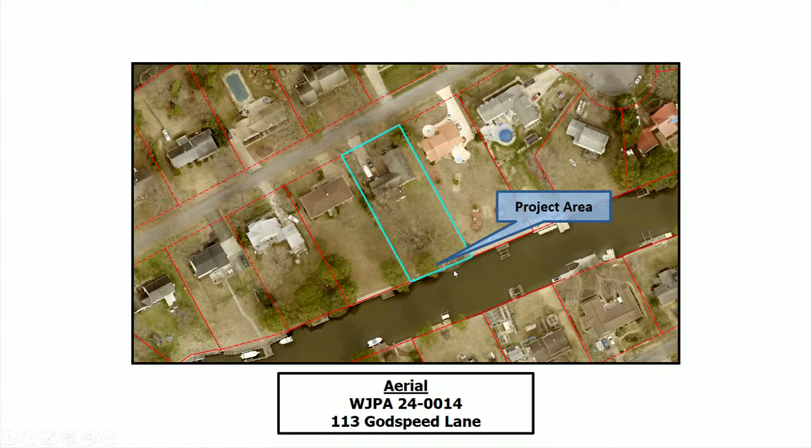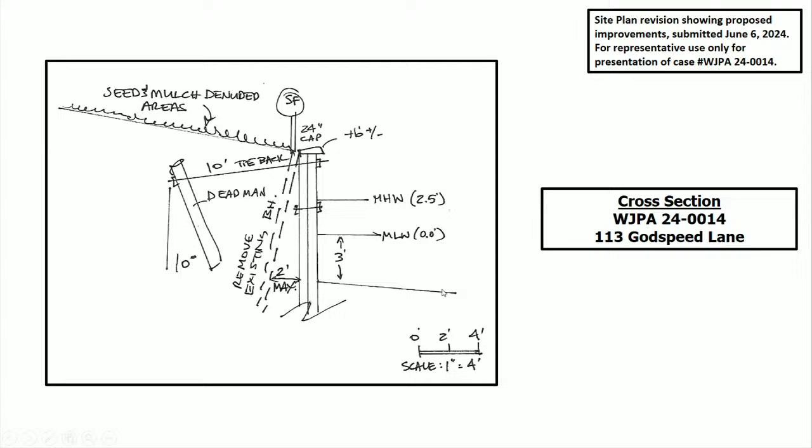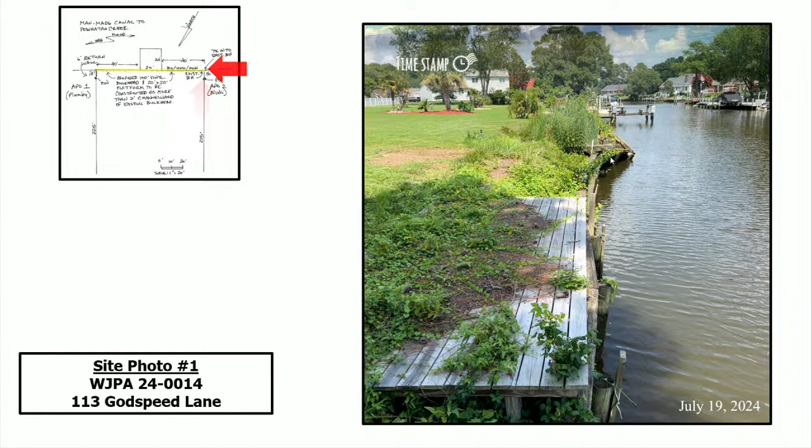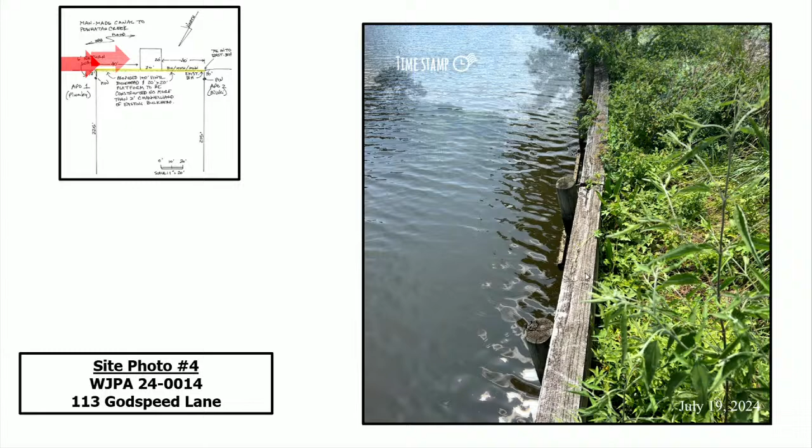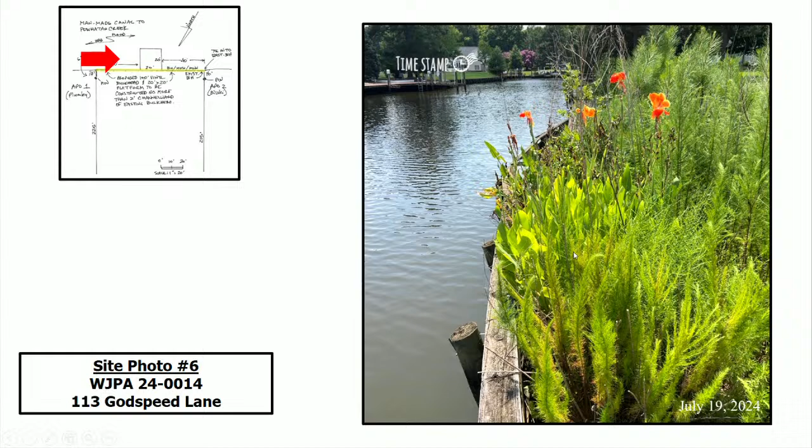Current site conditions, as you can see from this angle, you can see where that bulkhead's failed. And then this is where it's tying into the adjacent property line, kind of from that same corner. Here's some existing vegetation where that bulkhead's failed. This is from the other side of that bulkhead, kind of from that point where it'd be tying in again to the adjacent property's bulkhead. And then just another shot from that same side of, again, where that bulkhead has failed, the vegetation and platform. Closer up image of the vegetation growing. Let me see.

As published in the Virginia Register on July 11th, 2005, the revised Wetland Mitigation Compensation Policy and Supplemental Guides, Regulation 4 VAC 20-390-10. Virginia, as a Chesapeake Bay program partner, is committed to, quote, achieve a no net loss of existing wetlands acreage and function in the signatories' regulatory programs.

In order for a proposed project to be authorized to impact wetlands and compensate for the wetland loss in some prescribed manner, the following three criteria must be met. One, all reasonable mitigative efforts, including alternative siting, which would eliminate or minimize wetland loss or disturbance, must be incorporated in the proposal. Two, the proposal must clearly be water dependent in nature.

And 3, the proposal must demonstrate clearly its need to be in the wetlands and its overwhelming public and private benefits. If the proposed project cannot meet one or more of the above criteria, the project must be denied or must occur in areas outside of wetlands. Should it satisfy all three criteria, however, compensation for the wetland loss is required. The sequence of acceptable mitigation options should be as follows: on-site, off-site within the same watershed, mitigation banks in the same watershed, or a payment of an in lieu of fee. If compensation is required, it should be a condition of the permit.

Staff has reviewed the application and finds that this project meets the three criteria outlined above. There are 90 square feet of vegetated wetland impacts associated with this project. Staff will require the purchase of 90 square feet of tidal wetland mitigation from a qualified tidal wetlands mitigation bank and proof of purchase prior to the start of the project. Staff has reviewed the above application and recommends approval of the application as presented. Should the board wish to approve the application, staff suggests the following conditions be incorporated into the approval.

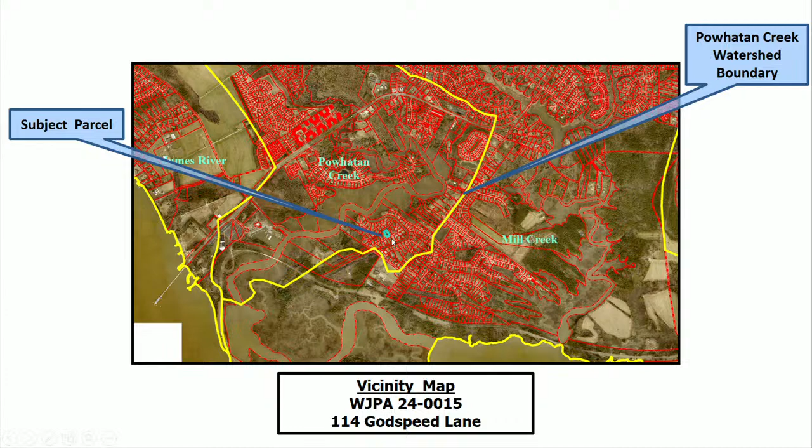Mr. Chairman, members of the board, Emily Grosjean presenting WJPA 24-0015. Ms. Carla Havens, Mid-Atlantic Resource Consulting, has applied for a wetlands permit on behalf of Mr. Gary and Ms. Kathy Nestor for the construction of a bulkhead, 20 by 20-foot platform, two 5-foot by 30-foot catwalks, and a boat lift on property located at 114 Godspeed Lane within the Powhatan Creek watershed. Again, we see that watershed outline here in yellow with the parcel in question in blue.

According to the submitted drawings, disturbance within the resource protection area for the installation of deadmen and tiebacks is to occur 10 feet landward of the canal for a total of 1,100 square feet of disturbance within the RPA. The disturbed area will be restabilized after the project is completed. Should the bulkhead construction also take place from the uplands, a revised site plan must be submitted for review and a possible land disturbing permit.

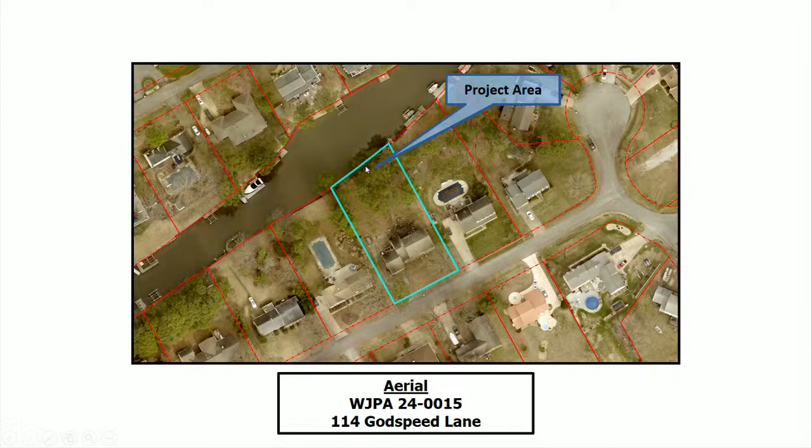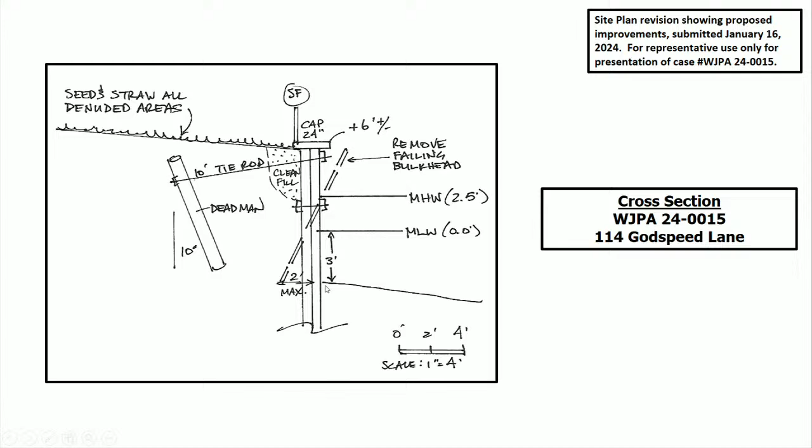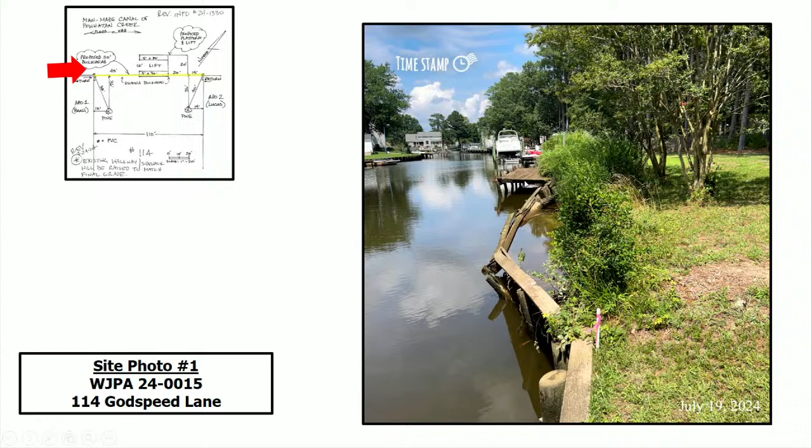And then this is, again, a cross-section, just kind of showing, again, that 10-foot deadman tieback along with any disturbed area to be stabilized thereafter. Current conditions, this is a tie-in with the adjacent property owner's bulkhead. As you can clearly see, this bulkhead has failed, which is causing failure of the existing platform as well. This path here will be brought to grade upon completion of whatever work.

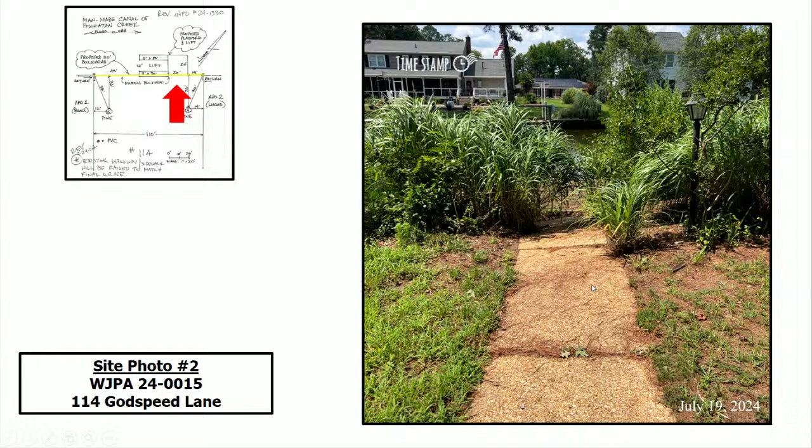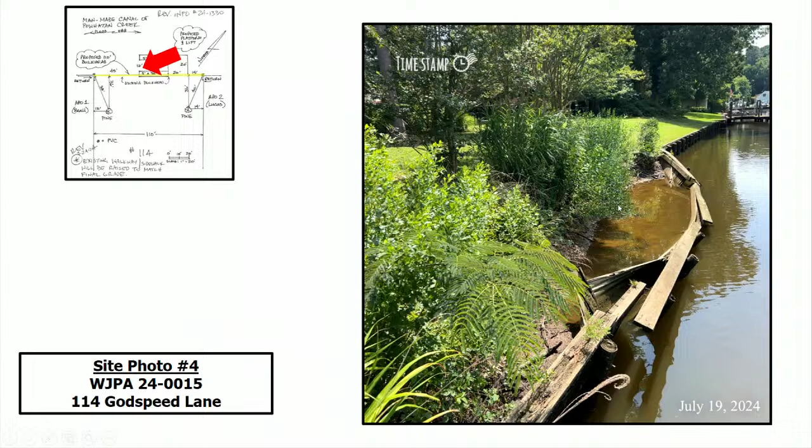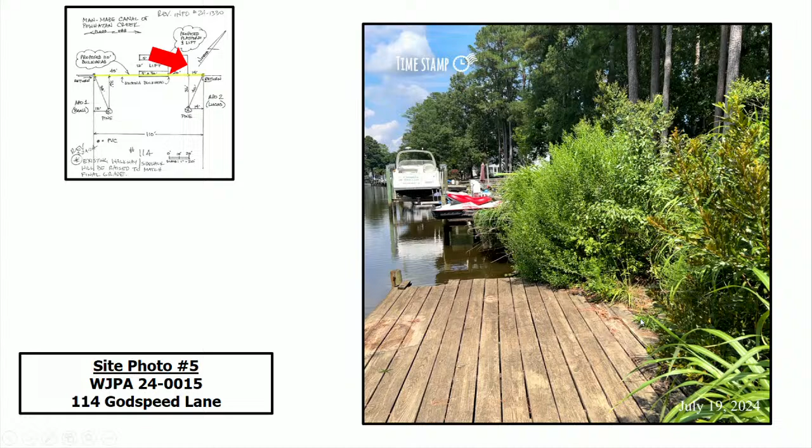And then standing on that platform, just from a different angle here, you can see again where that bulkhead has since failed. And just kind of a closer up shot, also showing any kind of vegetation that's grown in as a result of that failure. And then here's just another shot. You can't see it as well due to the vegetation, but again, where the other end of that bulkhead will be tying in with the adjacent property. And then just kind of, again, showing some of that vegetation, and you can kind of make out where that bulkhead has failed.

As published in the Virginia Register on July 11th, 2005, the revised Wetland Mitigation Compensation Policy and Supplemental Guidelines, Regulation 4 VAC 20-390-10. Virginia, as a Chesapeake Bay program partner, is committed to, quote, achieve a no net loss of existing wetlands, acreage, and function in the signatories' regulatory programs. In order for a proposed project to be authorized to impact wetlands and compensate for the wetland loss in some prescribed manner, the following 3 criteria must be met.

1, all reasonable mitigative efforts, including alternative siting, which would eliminate or minimize wetland loss or disturbance, must be incorporated in the proposal. 2, the proposal must clearly be water dependent in nature. And 3, the proposal must demonstrate clearly its need to be in the wetlands and its overwhelming public and private benefits. If the proposed project cannot meet one or more of the above criteria, the project must be denied or must occur in areas outside of wetlands.

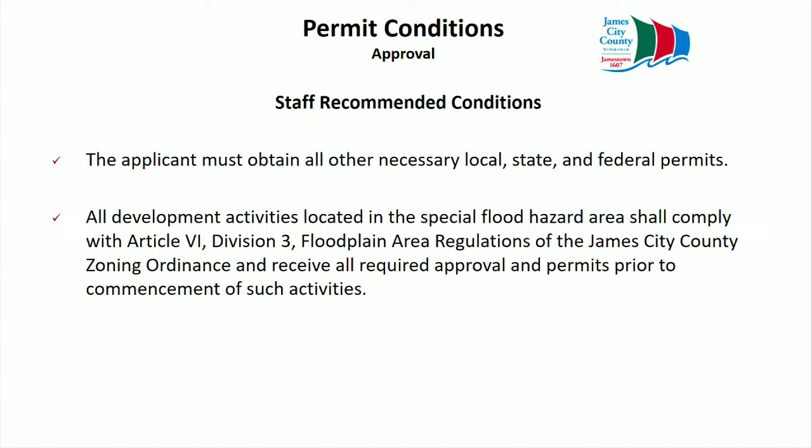Should it satisfy all 3 criteria, however, compensation for the wetland loss is required. The sequence of acceptable mitigation options should be as follows: on-site, off-site within the same watershed, mitigation banks in the same watershed, or a payment of an in lieu of fee. If compensation is required, it should be a condition of the permit. Staff has reviewed this application and finds that this project meets the 3 criteria outlined above. There are 10 square feet of vegetated wetland impacts associated with this project. Staff will require the purchase of 10 square feet of tidal wetland mitigation from a qualified tidal wetlands mitigation bank and proof of purchase prior to the start of the project.

Staff has reviewed the above application and recommends approval of the application as presented. Should the board wish to approve the application, staff suggests the following conditions be incorporated into the approval. Applicant must obtain all other necessary federal, state, and local permits as required for the project. Development activities located in the special flood hazard area shall comply with Article 6, Division 3 floodplain area regulations of the James City County zoning ordinances and receive all required approval and permits prior to commencement of such activities. Applicants must submit proof of purchase of 10 square feet of tidal wetlands mitigation from a qualified tidal wetlands mitigation bank prior to the issuance of a building permit.

The wetlands permit for this project shall expire on August 14th, 2027 if construction has not already begun. And if an extension of the permit is needed, a written request must be submitted to the Stormwater and Resource Protection Division no later than July 3rd, 2027, which is 6 weeks prior to the expiration date. If you have any questions, I'd be happy to take them at this time. Any questions for Ms. Grosjean? No, thank you. All right. Thank you, Ms. Grosjean.

I'd like to open up the public hearing on this matter. Anyone from the public wish to speak? Mr. Chairman, members of the board, Carla Havens, Mid-Atlantic Resource Consulting. Thank you again for another thorough presentation. Again, I've spoken with Tom Ty, and 10 square feet of tidal wetlands are available at his bank. Any additional questions? All right, thank you so much. Anyone else wish to speak? Hearing none, seeing none, I will close the public hearing on the matter, and the matter is before the board.

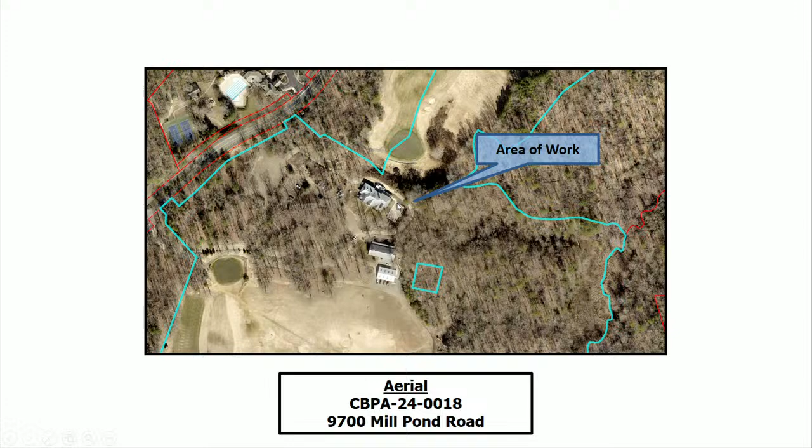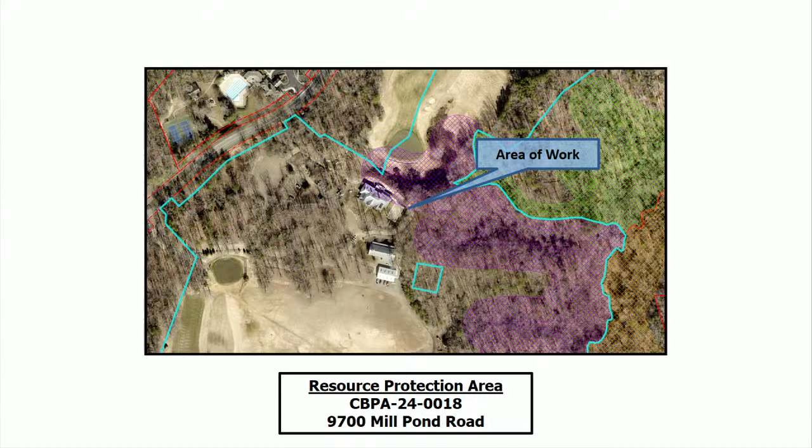From the site plan, the area in yellow, part of this concrete path, the gravel, part of the patio and retaining wall, all built without permits, and that's what's before the board tonight for an after-the-fact exception request. This right here is a cart path built with the golf course, and even though it's in the RPA, it is not under discussion tonight. It was built and approved prior to the RPA extensions in 2004.

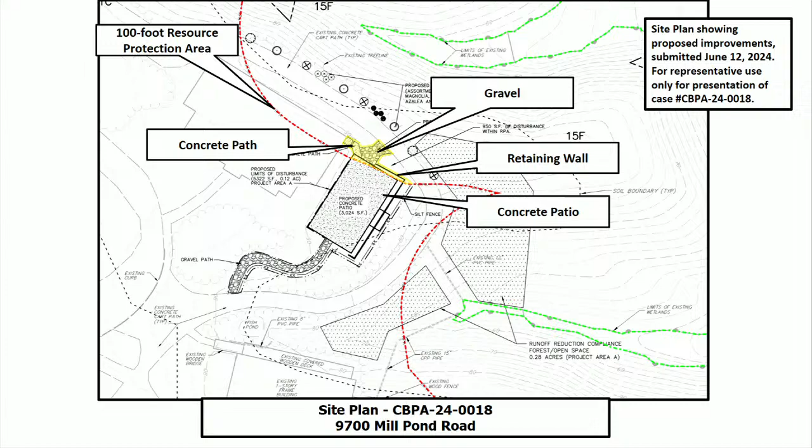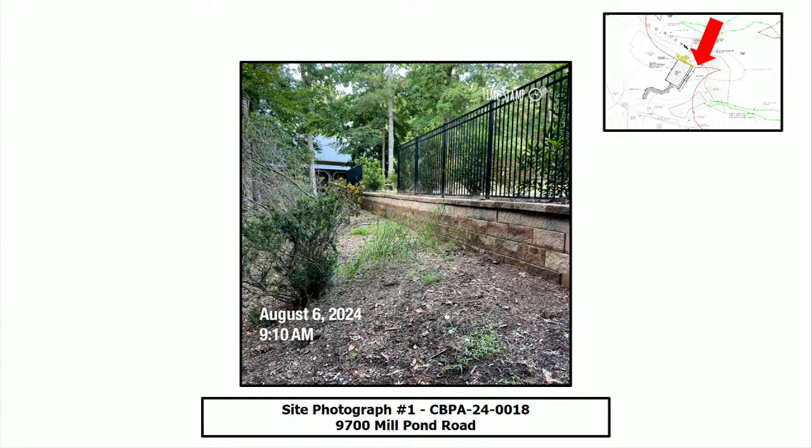A couple of site photographs of the area in question. The retaining wall in question is less than 3 foot in height, does not require a building permit, but still required Chesapeake Bay Board approval. Some plantings up here between the retaining wall and the patio, as you can see. And then the gravel path from the cart path down here in the lower right. The building, again, that's the restaurant. And then this sidewalk down into the patio.

A couple other views. There's this portion of the patio that's in the RPA. And the view is looking at the 18th green from the golf course.

So the total lot size for the property is just under 48 acres, of which 40% is located within the RPA. In December of 2022, officials from the James City County Stormwater Resource Protection Division did receive notice that a concrete patio and retaining wall were being installed on the property without the submission of a Chesapeake Bay Preservation exception, building permits, or an approved site plan.

The applicant began the process of obtaining the site plan and permits for the construction of the patio and the retaining wall. If the required site plan had been submitted initially as part of the normal process, staff would have worked with the applicant to adjust accordingly to get the patio out of the resource protection area to the greatest extent practicable.

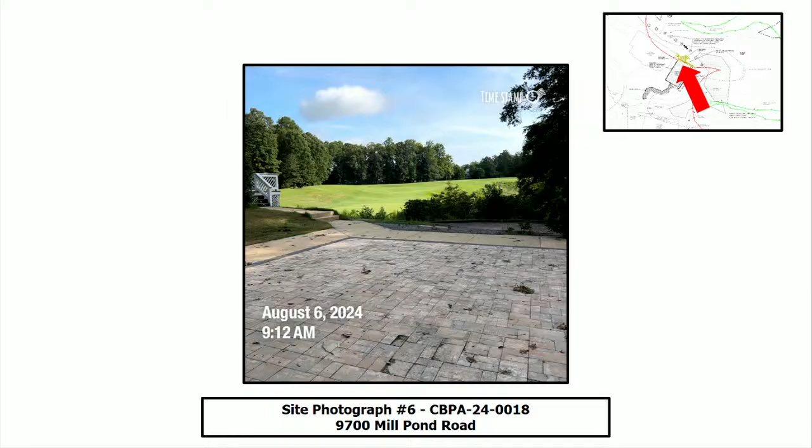The board may grant exception to 23-7 if the application meets the following 5 conditions that are outlined in the ordinance. And those are right here on the screen. And that's that the exception request is the minimum necessary to afford relief, that it doesn't confer special privilege denied to other property owners similarly situated in the vicinity, that the exception request is in harmony with the purpose and intent and is not a substantial detriment to water quality.

The exception request is not based on conditions or circumstances that are self-created or self-imposed, and that reasonable and appropriate conditions are imposed which will prevent the exception request from causing a degradation of water quality.

Staff has reviewed this application and exception request and determined the impacts associated with this approval to be minor for the proposed development. If the board wishes to approve this after-the-fact request, staff does recommend the following conditions be incorporated into that approval. That the applicant provide all other necessary local, state, and federal permits as required. That the applicant must submit a mitigation plan of 5 canopy trees, 10 understory trees, and 15 shrubs to the Stormwater Resource Protection Division prior to site plan approval.

That the applicant submit a surety of $5,000 in a form acceptable to the county attorney's office to guarantee the mitigation plantings, and that this exception request approval become null and void if the site plan has not achieved final approval by August 14, 2025. Be happy to answer any questions the board may have regarding this matter.

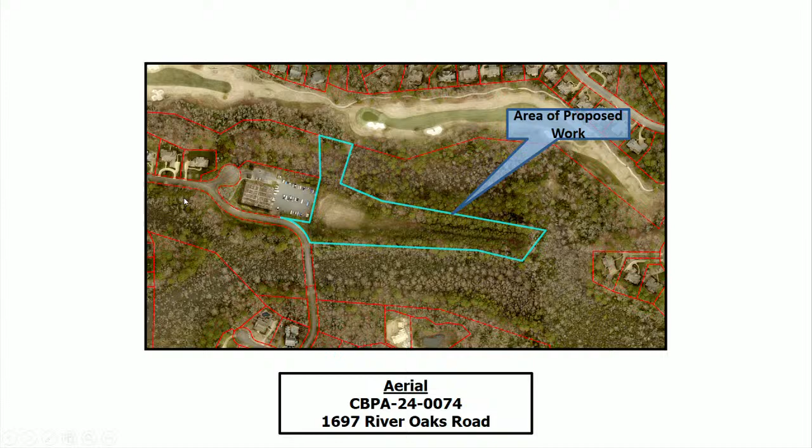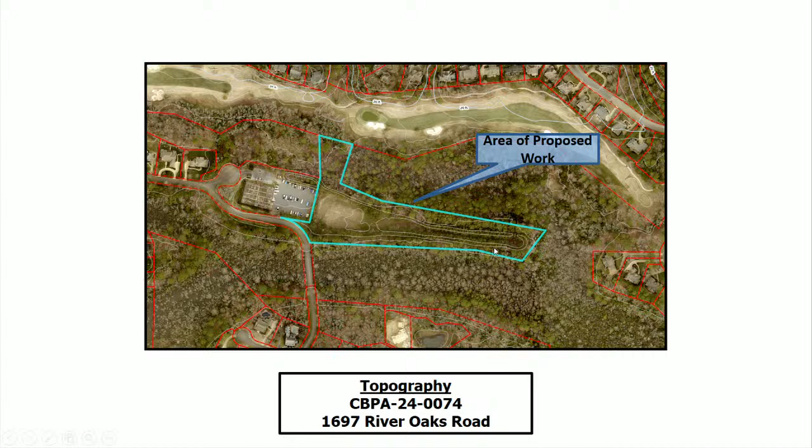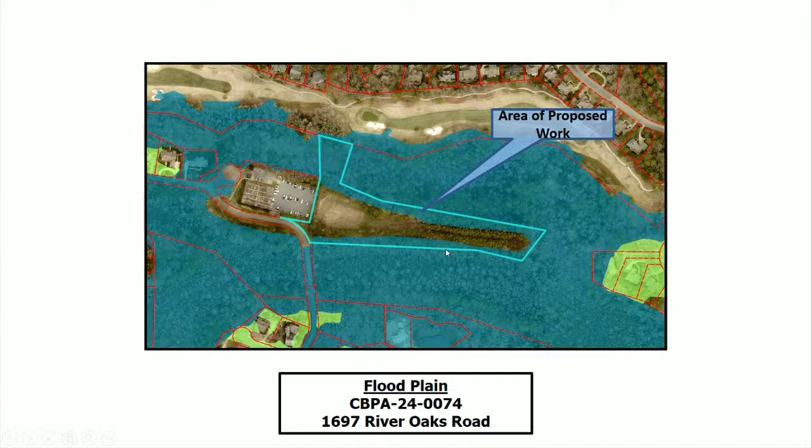I would suggest to you that the mapping on this floodplain line will not be on the interior of the project, which is where the dredge spoils are going to be. The elevation difference is too great. The floodplain elevation surrounding the property is elevation 7.

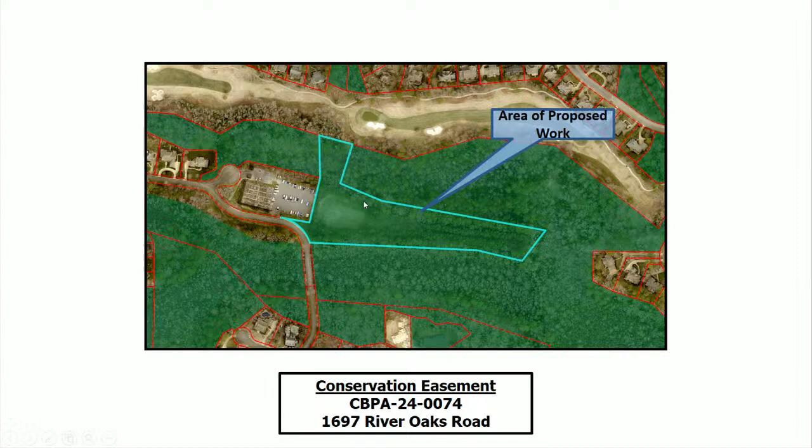And then conservation easement over top of the entire parcel and the entire wetland RPA system surrounding Governor's Land Foundation property. Those conservation easements were set up in the original layout for Governor's Land in the late 1990s and early 2000s when the project went before the Board of Supervisors and the Planning Commission for review and approval. And those conservation easements are laid out in the special use permit conditions and the overall stormwater management for the entire property.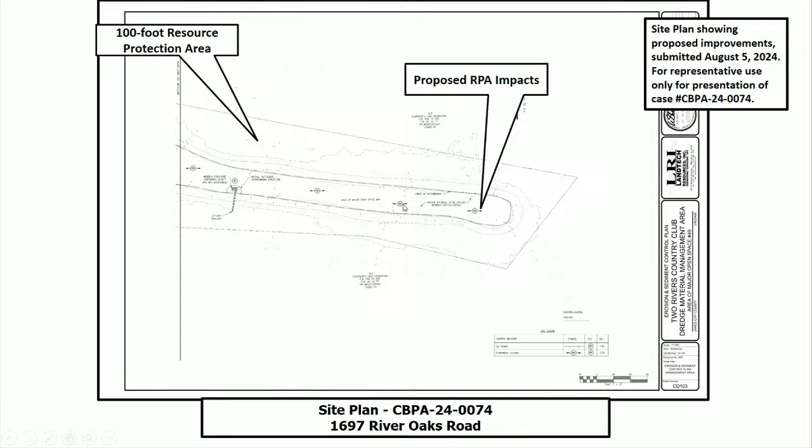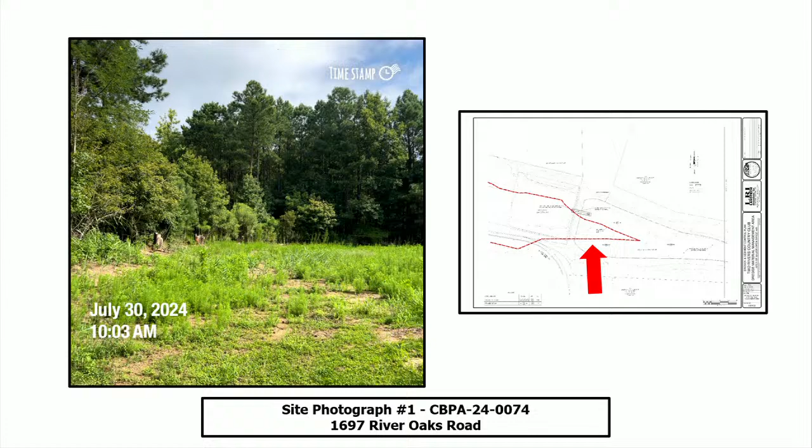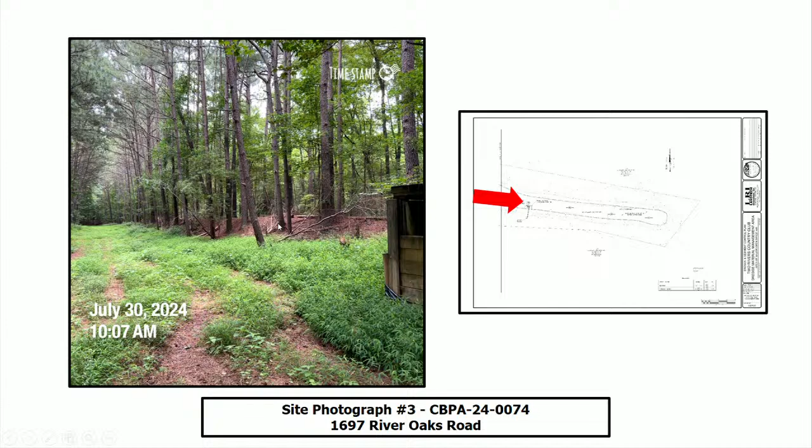A couple project site photos. The existing area is maintained. It's mowed several times a year. And there's a perimeter berm around it that has had pine trees allowed to grow up on it over the years.

So in 2000, Two Rivers Country Club applied for a wetlands permit to dredge the marina. The case number was W05-00, and the VMRC permit was 00-0240. And it was determined at that point in time that a wetlands permit from the local wetlands board was not required, as the project did not involve wetlands within the board's jurisdiction.

However, it was noted that a land disturbing permit would be required prior to the project starting, and the area for the dredge spoils was not considered RPA at that time. The public record available for that case made no mention of conservation area or impacts to the conservation area.

In 2007, Two Rivers Country Club again applied for a wetlands permit to also dredge the marina. And that case number was W-11-07, and the VMRC number was 07-0842. It was determined that a wetlands permit, again, was not required from the local wetlands board because the project fell outside your jurisdiction. It was all below mean low water.

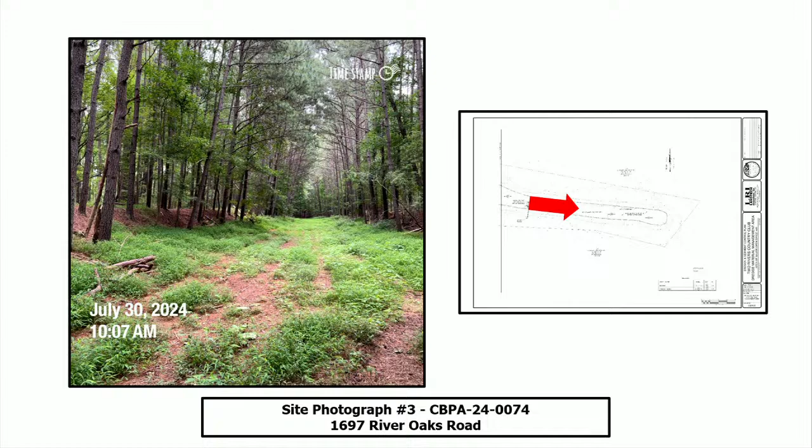Again, the board may grant exceptions to section 23-7 if the application meets the following 5 conditions: that it's the minimum necessary to afford relief, that the exception will not confer any special privileges denied to others in the same situation, that the exception request is in harmony with the purpose and intent of chapter 23 and is not a substantial detriment to water quality, that the request is not based on conditions or circumstances that are self-created or self-imposed, and that appropriate conditions would be imposed that will prevent the project from causing a degradation in water quality.

Staff's reviewed this application and the exception request and has determined the impacts associated with this proposal to be major for the proposed development.

If the board wishes to approve the request, staff does recommend the following conditions be incorporated into that approval: that the applicant obtain any other necessary local, state, and federal permits for the project, that the exception request become null and void if construction has not begun by August 14, 2025, and that a written request for extension be submitted no later than July 3rd, 2025, 6 weeks prior to that expiration date. Be happy to answer any questions that the board may have on this matter.

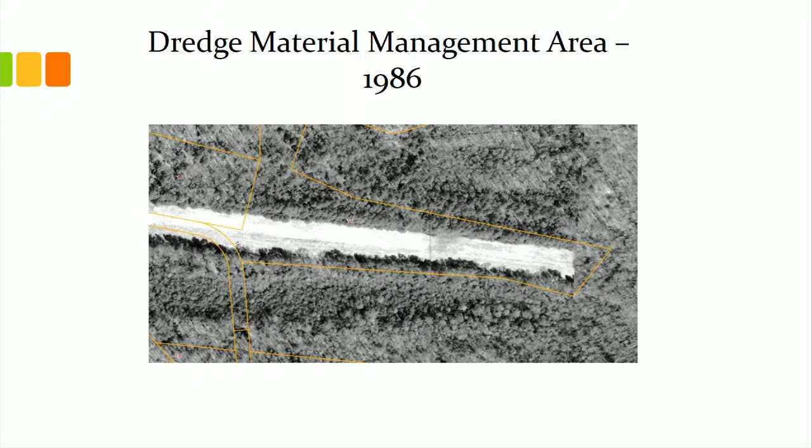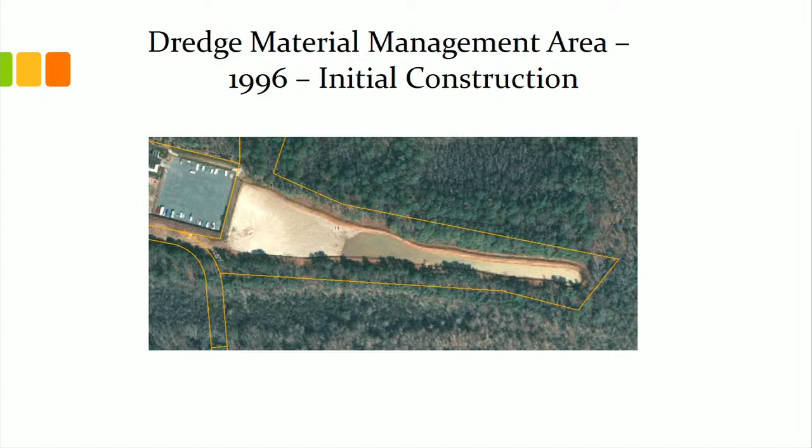This area has been a farm field from at least 1937 to present day. In 1986, it was still a farm field. In 1996, the field was converted from a farm field to a dredge material management area with berms installed all the way around the facility. In 2002, you can see it was maintained as a field as it was before construction. As staff mentioned, after the 2000 dredging, a land disturbance permit was required and obtained, but there was no RPA permit required due to the fact that the existing wetlands in the woods would have been considered a non-RPA feature.

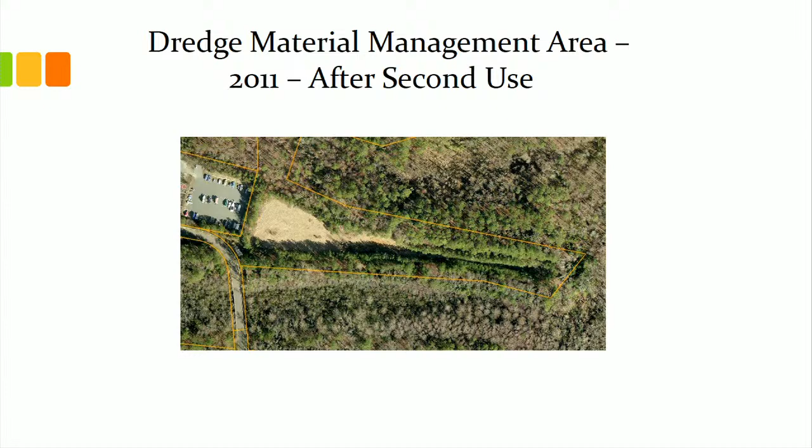Unlike the original hydraulic dredging operation, which was completed utilizing a pipe to this area, the proposed operation will be completed with a sealed hauling truck. Material will be excavated from the marina and placed on a barge. The barge will then be docked in the marina and place the material into a sealed truck that will haul

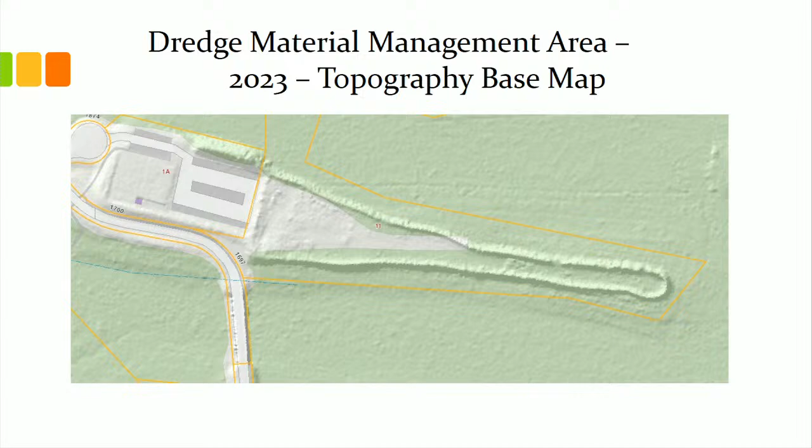it to this site. The reason I bring this up is to highlight that the dredging will be done in a controlled manner and there will not be material escaping and going all over. The enclosed truck, along with the existing 6-foot tall berm, go hand in hand with this BMP.

Finally, I would like to address staff's comment that this area has enough capacity for one more dredging. Based on the calculations by the firm handling the permit drawings, that is a correct statement. What it does leave out, though, is the fact that in a dredge material management area, disposal of the material can be excavated out at a later date and removed to an off-site property.

As staff had mentioned, there's no other place on Governor's Land property to place the material, and it would need to be taken to an appropriate off-site location. Governor's Land has talked about this solution for years and has planned to do this once it becomes an actual need. Since the facility has been utilized 3 times and a proposed 4th, it has not been an action they have needed to take. In conclusion, we request approval of this exception request for the continued use of this facility.

There will be no degradation to water quality due to the existing BMP features in place. Upon completion of the project, the site will be established back to a field and maintained for future use. I'm happy to answer any questions you may have.

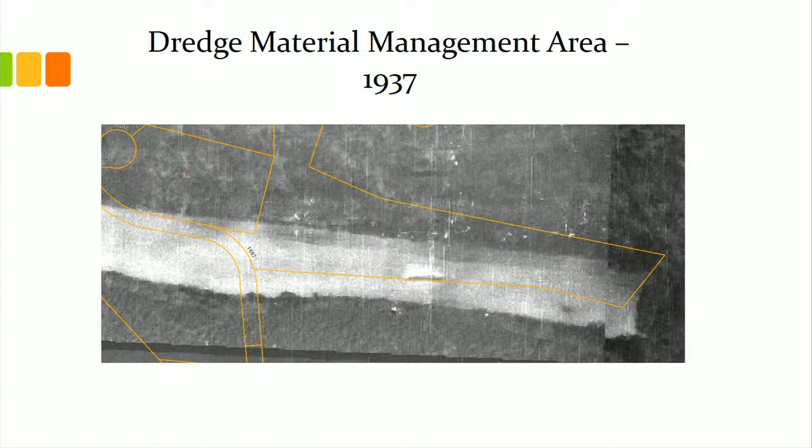Yes, it eventually will have to be mucked out, which kind of alleviates that, but the point here being this is a facility that has been maintained, has been worked on, and the intent is they would like to continue to maintain it. And so thus planting a bunch of plants over top of it or doing mitigation kind of defeats that goal and that purpose. So our goal with this meeting, especially after kind of what happened in 2007, is to more establish this formally as an ongoing dredge material management area that can be utilized for many years to come, as it has been for the last 30 years.

Okay, so the precedent was established early on, and you're continuing down that path. Yeah. Okay. And that it hasn't been woods for a very long time. Right. Okay, thank you.

Back to board discussion. Any more internal thoughts? So, Mr. O'Brien, I did visit the site yesterday. The berms are very stable. The temporary vegetation that's there provides good cover at the moment. I'm not sure exactly what type of mitigation would be called for. That was requested. It looked like a pretty stable site to me. Internal discussion, in which case I will close the public hearing and entertain a motion for this particular application.

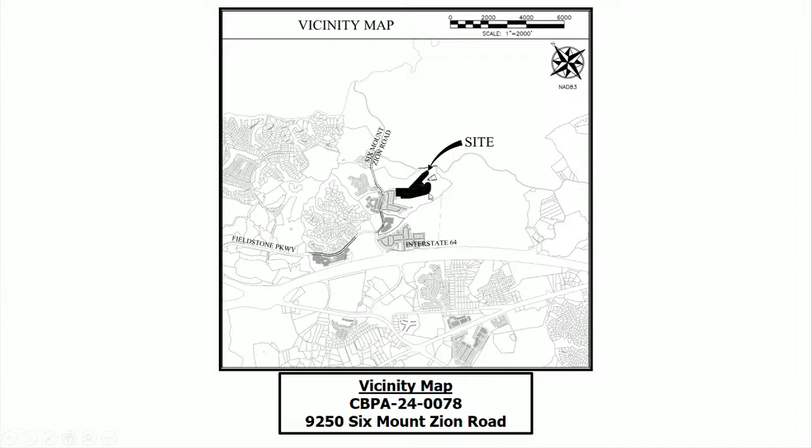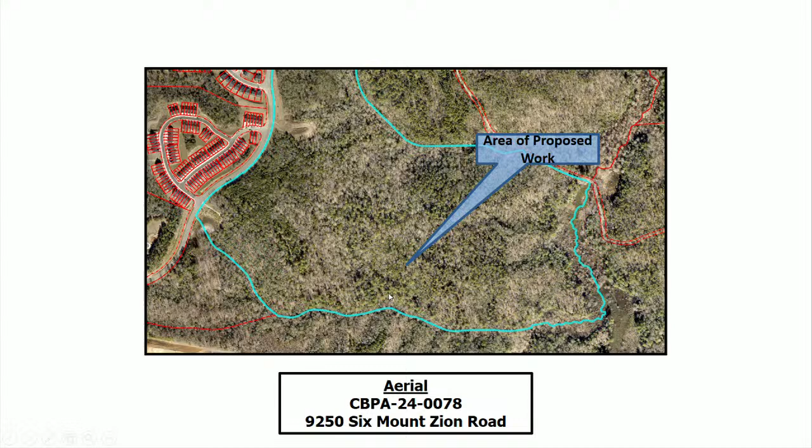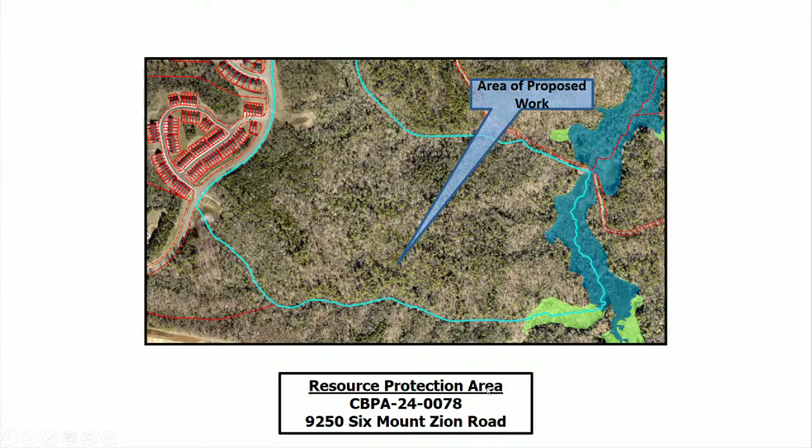So just as a general overview, because it is such a large parcel, the parcel itself is here. However, this phasing of construction where the sanitary sewer trunk line will be installed is to occur in this little blacked out portion here. Just moving in closer, again, we see that Ware Creek watershed boundary in yellow with the parcel enlarged in blue. To bring it in further, the location of the proposed work is to take place in this general area. Here's the existing topography along with the current resource protection area. And that should say floodplain, but as you can see, it's not within any floodplains.

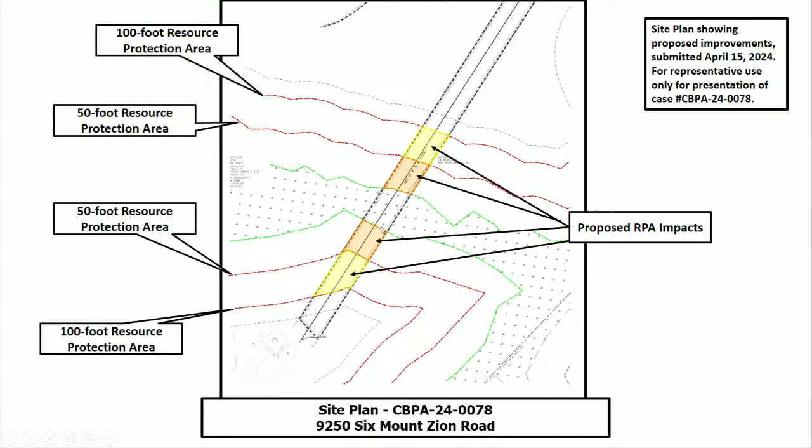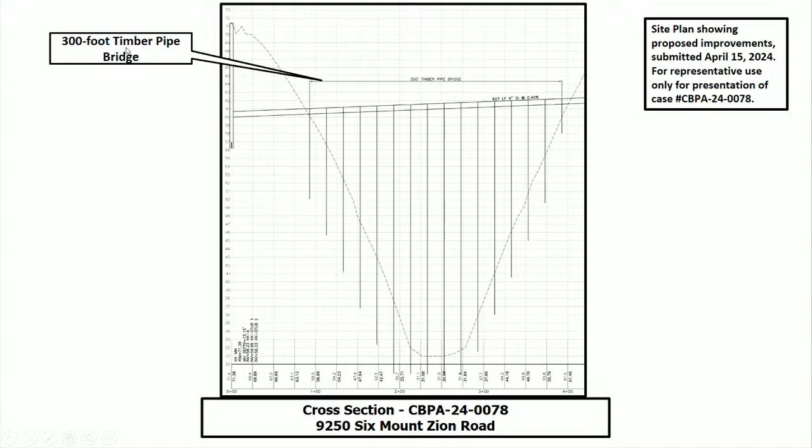The impacts that we're assessing for the sake of this case include the 50-foot landward and 50-foot seaward. The actual wetland impacts, if any, are covered under a permit and are not to be considered by the board. This is also just a cross-section of the proposed sanitary sewer trunk line, the 300-foot timber pipe bridge. And then some existing site photos, just very heavily vegetated. Not much to see as of right now.

Staff has evaluated the application and exception request for the installation of a sanitary sewer trunk line. This application meets the ordinance conditions in sections 23-11, 23-14, and should be heard by the board because the construction of a sanitary sewer trunk line cannot be approved administratively. The board may grant exceptions to section 23-7 if the application meets the following 5 conditions outlined. I clicked a little too soon, but you all have a placard in front of you.

Staff has reviewed the application and exception request and has determined the impacts associated with the proposal to be minor for the proposed development. Staff recommends approval for this exception request, and if the board wishes to approve the request, staff recommends the following conditions be incorporated into the approval.

The applicant must obtain all other necessary federal, state, and local permits as required for the project. The dedication of an open space easement equal to more or less 23,000 square feet beyond what the VRRM required must be addressed in the subdivision plat prior to the approval of said plat by staff.

The exception request approval will become null and void if construction is not begun by August 14th, 2025, and written requests for an extension to an exception must be submitted to the Stormwater and Resource Protection Division no later than July 3rd, 2025, which is 6 weeks prior to the expiration date. If you have any questions, I'd be happy to take them at this time. Any questions for staff?

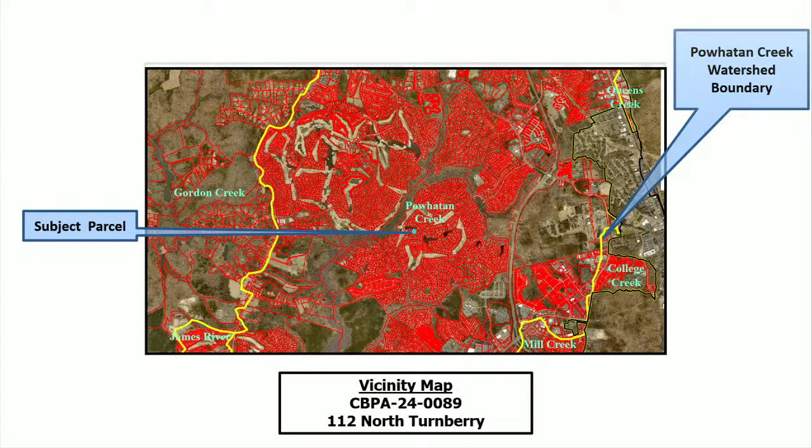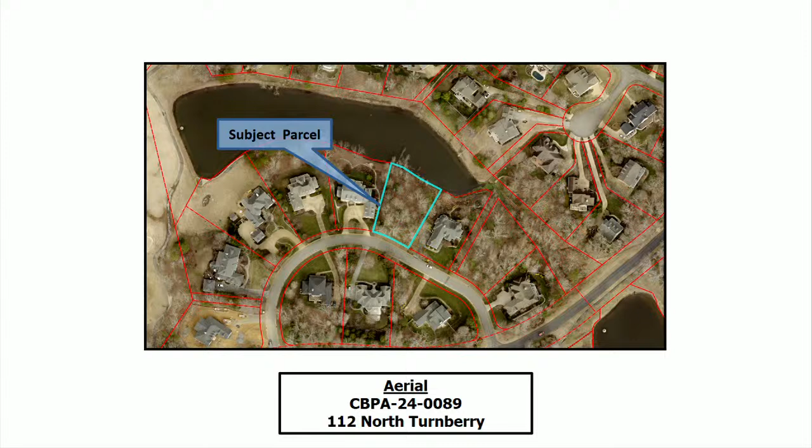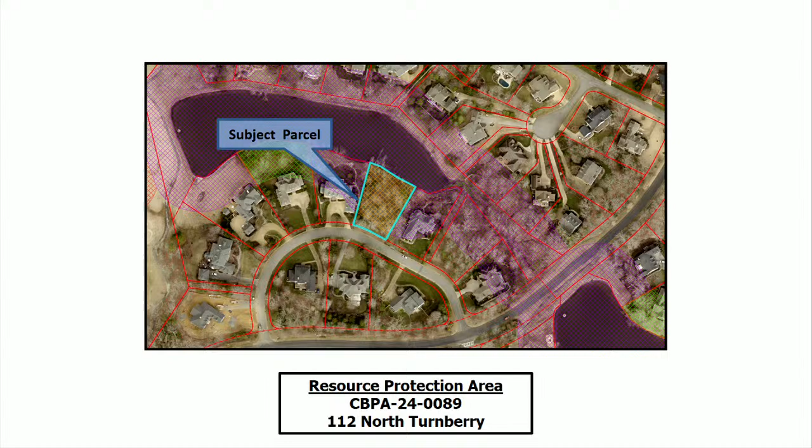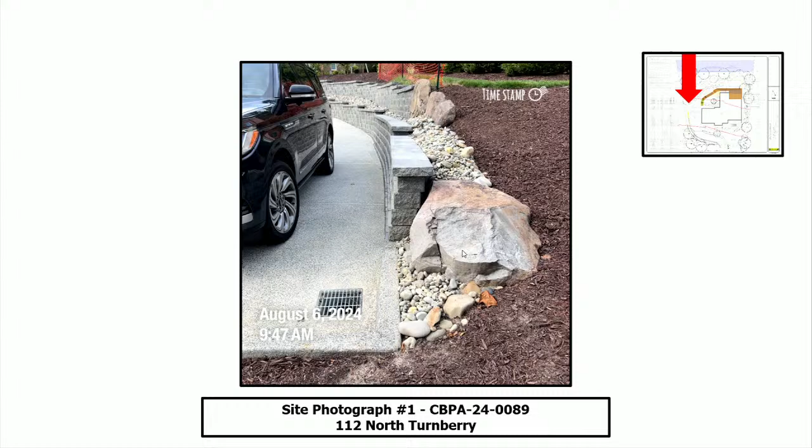A couple site photographs. This is that retaining wall that was extended, holding back the grade from the adjacent property here. The project, the sidewalk as it comes around the side of the house, this is the portion I pointed out that was not yet built. You can also see this is the one corner here that had that patio that had been approved, and that patio is not built.

This retaining wall is also up for discussion. It's necessary for the patio as constructed. The original proposal, I'm going to backtrack here a little bit. The original proposal had a retaining wall, and I forgot to point this out. It did have a retaining wall originally in this location.

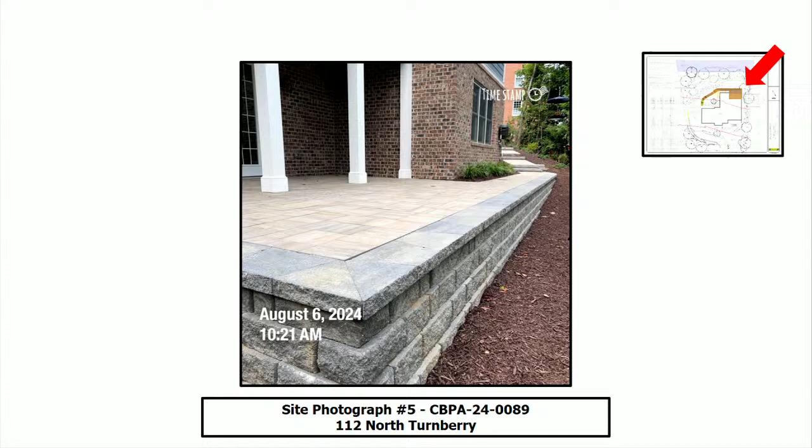The board may grant exception to 23-7 as previously stated, outlined in the ordinance, and that's if the exception request is the minimum necessary to afford relief, that the granting of this exception would not confer any special privileges on other property owners in a similar situation, that the exception request be in harmony with the purpose and intent of Chapter 23, not a substantial detriment to water quality, that this request is not based on conditions or circumstances that are self-created or self-imposed, and that reasonable and appropriate conditions are imposed which will prevent the exception request from causing a degradation in water quality.

So staff's reviewed this application and has determined the impacts associated with the proposal to be minor for the additional impacts. If the board wishes to approve the request, staff recommends the following conditions be incorporated into that approval: that they get any other necessary local, state, and federal permits as required for the project, that a revised affidavit be recorded in the Williamsburg-James City County Courthouse prior to the release of surety,

that a surety of $2,000 to guarantee the plantings of 2 additional planting units, that the applicants submit a revised mitigation plan equaling 13 planting units, that the exception request become null and void if construction is not begun by August 14, 2025, and that written requests for an extension to this exception be submitted no later than July 3, 2025. Be happy to answer any questions the board may have regarding this matter.

Any questions for staff? So you came up with 13 because of the 11 previous, plus the 1 additional, plus the 1 because of after the fact. Correct. Mr. Wilson, could you go back to the slide that shows the original retaining wall? So if I understood you correctly, they were authorized to disturb up to and including that original retaining wall. Yes, sir. The disturbance has been reduced, but the impervious area has increased. That is correct. Thank you. If they would have included all this, we probably would have passed this originally to do what they want to do right now.

I think looking at the whole project, whoever did the work did a real nice job. I mean, it's a quality job. The picture there shows the pillars. Come back, yeah, right there. The original was there where the pillars are. That was all cut out. That was what was added there.

So you really had, maybe you didn't have any way to even get around the house, because I see there's a walkway that comes all the way around and ties into that. Am I correct on that? You are correct. So it made it more feasible, livable, whether they had a wheelchair or whatever to access in and out of it if they had a fire or whatever. So they made the place more livable, and they did a good job on it. It's a shame that they didn't include that originally when they went for the site plan.

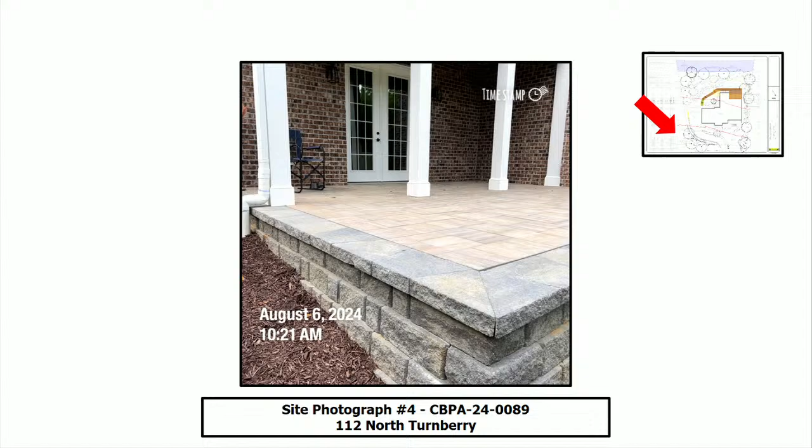Any other questions for Mr. Wilson? Thank you. I will open the public hearing. Would the applicant or their agent care to address the board?

My name's Aaron Williams. I'm with Williams Landscape and Design, and our address is 1554 Penniman Road, Williamsburg, Virginia. And we are the landscape company who installed the patio, plantings, and the entire project. Mike, is there a way that we can show that drawing one more time? And can I point with this? Thank you. So first of all, Michael did a great job explaining the entire project. I just want to point out a couple of quick things or reinforce what Michael already said.

So this pre-approved retaining wall would have been behind what the builder had put in as a chain link fence that wrapped to protect the RPA. So let me explain a little bit about the previous submission to where we got today, and I will apologize, we didn't follow the procedure we should have followed. We didn't get involved in the project until probably April, and there was a severe deadline by the builder to get approvals, get everything done.

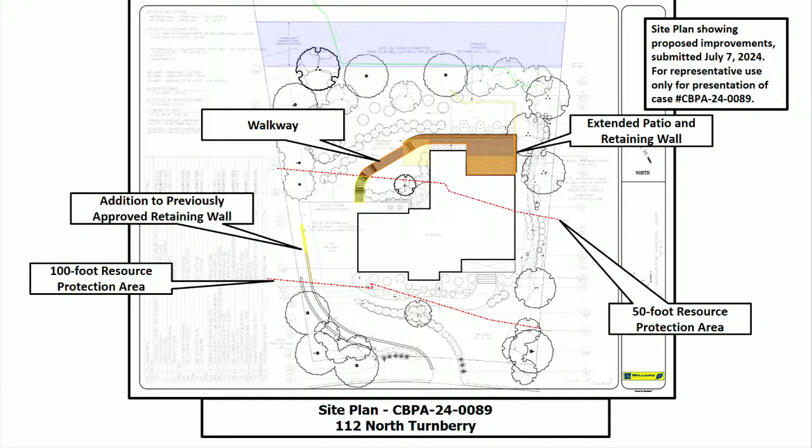Thank you very much for your presentation. Thank you. Would anybody else care to address the board? Feel free to come forward. Your name and address for the record, please. Daniel Dead, 16 North Turnberry, next door, and I lived there for 22 years with an empty lot.

We had some concern, obviously, when this construction was started. We met Dave and Karen. We spoke to them at length. They have kept us informed of everything they're doing. If we weren't happy with it, we would let them know. They might change it, they might not, but we've had a good relationship.

We were concerned because it was an empty lot. We didn't have to worry about it. Now, everything's coming down. There's going to be a house there. Will we have water concerns? We don't have any concerns. Anything we were concerned with, anything we asked, we got. I think you should really consider giving approval to what they want to do because they're first class.

We have no complaints. We could have complaints, but we don't. They're nice people. They mean to do it the right way. In my opinion and my wife's opinion, they're doing it the right way. We would complain because, you know, we've lived there for a long time, and if we weren't happy, we would complain. We've asked for some things to make us happy. They're doing it.